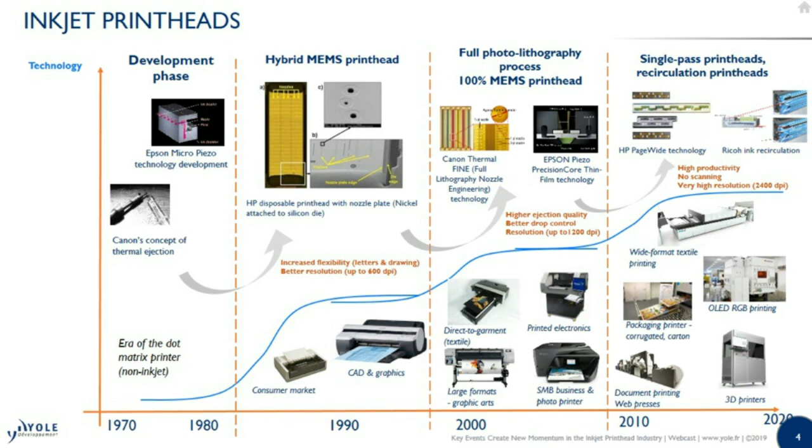As a new definition, I would like to do a reminder of the different techniques that we are using in inkjet technologies and what we are covering also at Yole Développement. The technologies or the ejection principle are either continuous or drop on demand. We are focusing more on drop on demand because it's where the number of players is larger. And for drop on demand, we can separate it into two main actuation technologies: thermal for one and piezoelectric on the other.

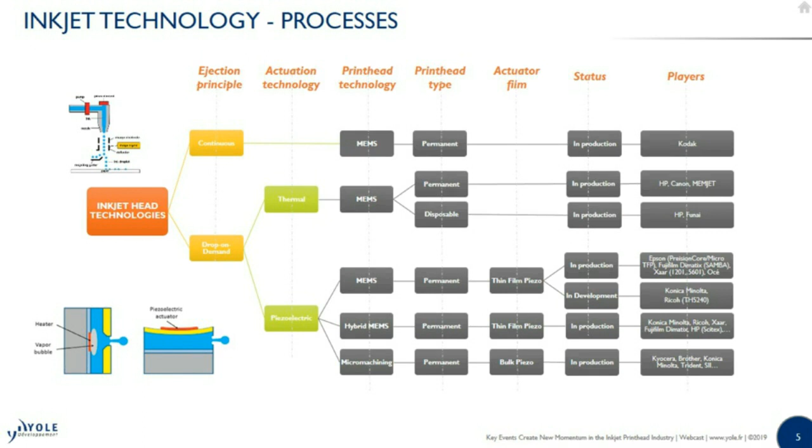Those two different ejection principles are mainly segmenting the players in two, and this is what I would like to show here in this area. Again, it's a mature market with a limited number of players.

The leaders are still the same that you probably know in thermal for the drop-on-demand ejection: HP, Canon, Funai after the acquisition of Lexmark, but also Memjet, that is an increasing player in terms of market share in this sector. We will discuss RealFast Print Technology later on.

In Piezo, Epson, Fujifilm Dimatix, Xaar, Brother, or Konica Minolta are main players. It's where you have the most important number of players in this piezoelectric area.

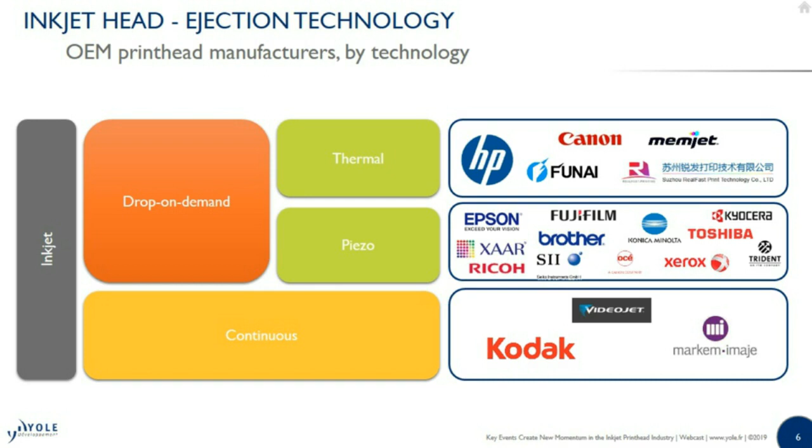In the continuous market, it's mainly Kodak that is the leader in this area. Based on the technology, we have the conventional printheads. What we name the conventional printheads are the printheads based on bulk PZT, so it's the piezo ceramic that is processed to get the actuation.

You can see again the players I mentioned just before, but we also have the MEMS printhead players, and this industry is a little bit different because it means you need to have some semiconductor capabilities to manufacture MEMS printheads. This is synonymous with huge investment and some critical knowledge to manufacture either thermal on one hand or thin film piezo ejection devices.

So here we can have IDMs, the companies that are manufacturing their own printheads, but we would also like to mention the foundries that are helping in this area to manufacture the MEMS part of the printheads or the full printheads.

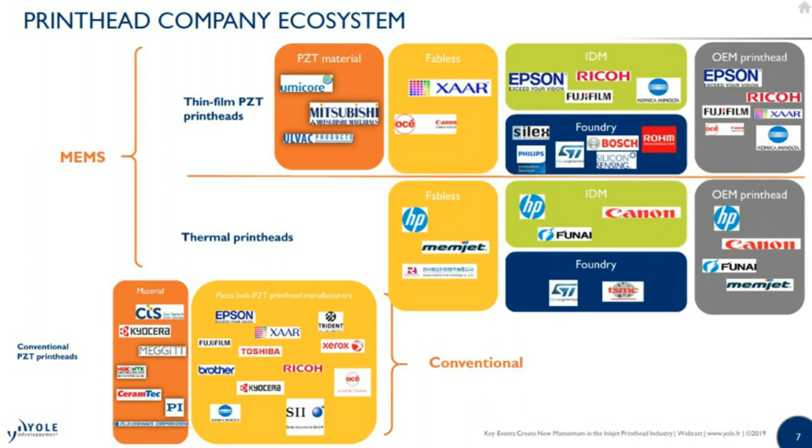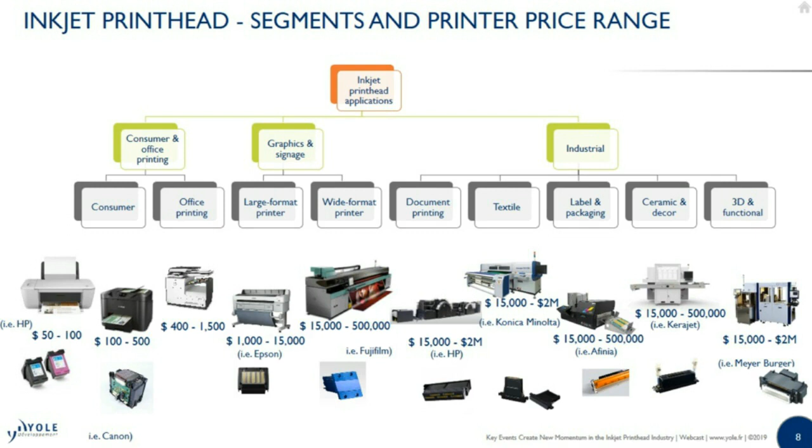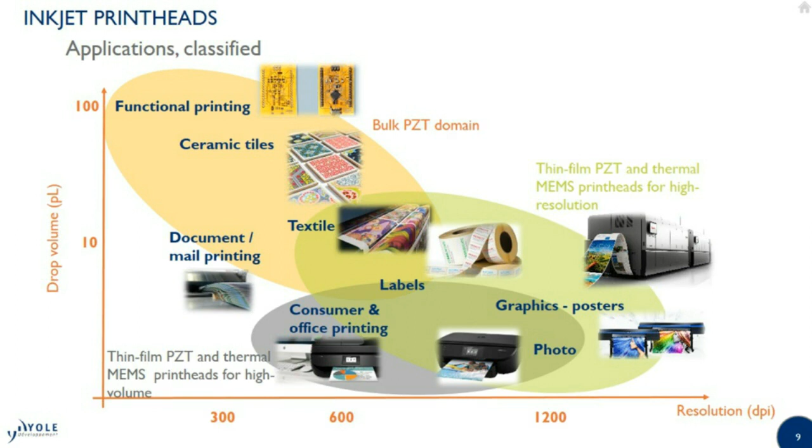Related to the three major markets I mentioned, I would like to show you the results we get from our investigation on the inkjet printhead market. This printhead market has a global forecast that is growing at a 4% compound annual growth rate.

This market is expected to reach $2.7 billion - it's the inkjet printhead market again - coming from a 2.09 or 2.1 billion dollar market in 2018.

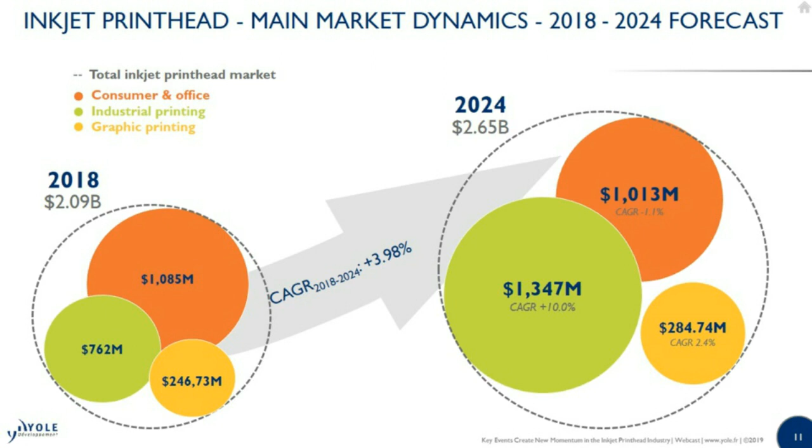About the players: they have a global presence on the main continents, with their headquarters. A lot of companies are based mainly in Japan, but they also have offices, R&D activity, and even some production in Europe or the US, to be closer to customers and get information from their needs.

If we look at the market share, the four first companies represent about 45% of the market: HP Inc., followed by Epson and Canon, which are very close together, and Fujifilm Dimatix. These are the first industrial companies closer to the top three, which mainly serve the consumer market and graphics printing.

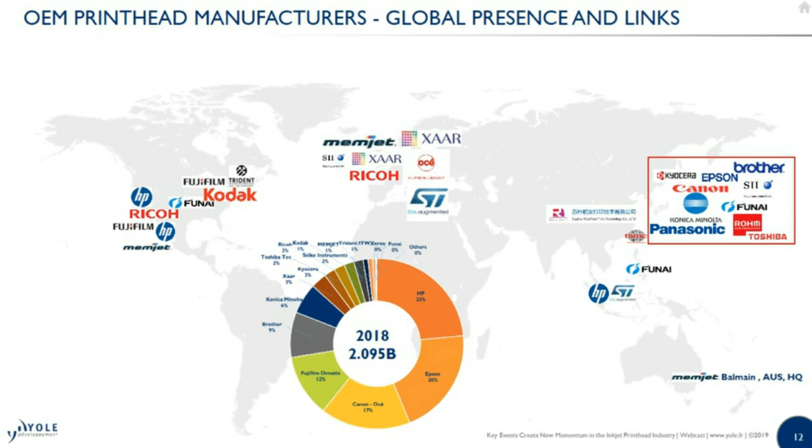About the key events, because the presentation is also based on key events: it's a mature market again, so we have a number of new products, but in terms of structuring the industry, the number of mergers, acquisitions, or events is really limited.

But anyway, we can highlight some very interesting and important events, like Panasonic, whose printhead assets were acquired by Konica Minolta in 2018, reinforcing Konica Minolta's access to MEMS thin film Piezo capabilities.

The announcement of a new player in the area of inkjet printheads: Ruifa Print Technology, a Chinese company that just announced they are ready to produce thermal inkjet printheads.

Epson has completed and announced the completion of a factory with a huge investment in buildings and new production lines, to increase PrecisionCore printhead output, which will also replace their former technology.

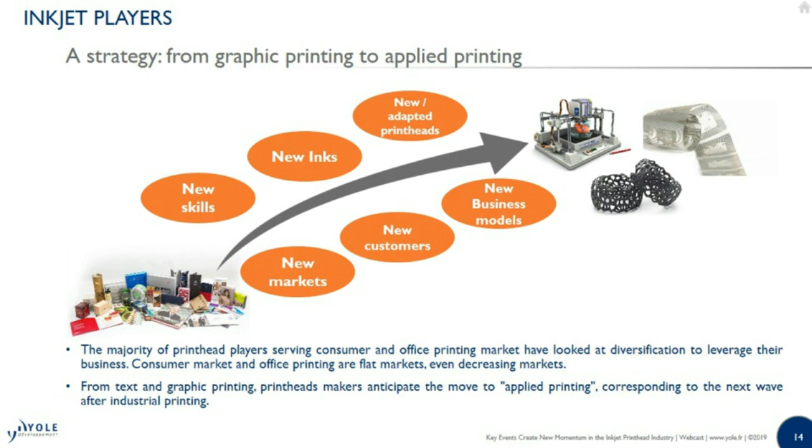To illustrate the different milestones of the major players: it started first from graphic to commercial printing in the past, with HP acquiring Scitex to move into commercial printing, and Canon acquiring Océ, the Dutch company, gaining access to document printing, large formats, and capabilities in Piezo printhead applications.

But now we are moving a step forward toward growth opportunities in the industrial market. Again, HP made the transition to 3D printing, even if it's not strictly 3D inkjet printing — it's a powder bed technology, but it uses their printheads to dispense the fusing agent.

The Konica Minolta acquisition of Panasonic, knowing that Konica Minolta is one of the companies involved in functional printing applications, like OLED display and lighting, shows they are really involved in this market. They wanted to take the opportunity to gain Panasonic's patents and capabilities in MEMS technologies and their development.

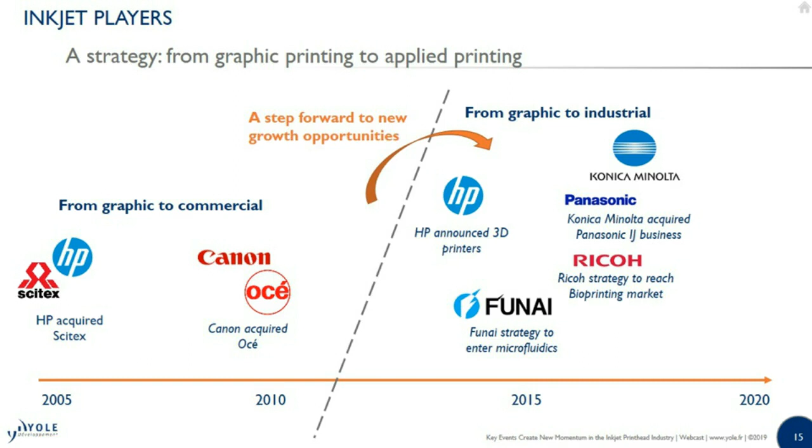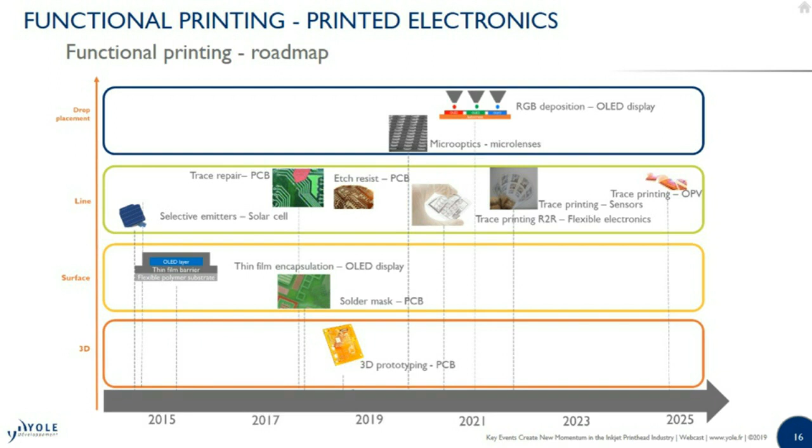This is one of the roadmaps we have established on functional printing, showing the applications of the display market, PCB, flex or printed and flexible electronics, where some growth is possible for inkjet printheads. This is also for biodispensing, just to show that inkjet printheads are also used for bioprinting, but several competing technologies are also in place.

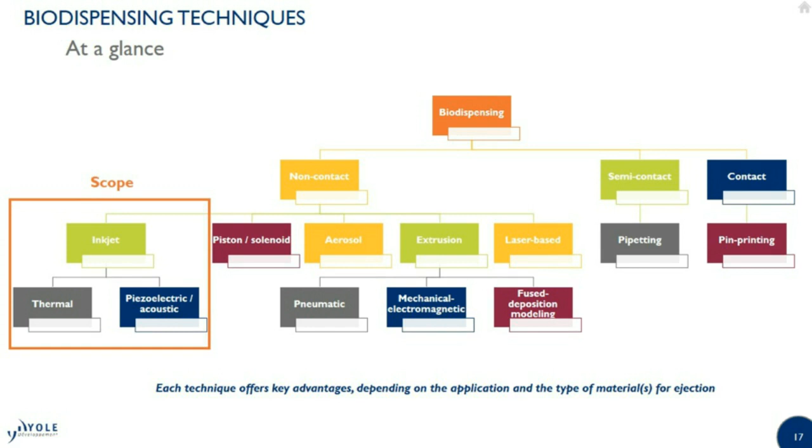It could create some opportunities, and here are some benchmarks of the techniques we have done, just to show that inkjet printing could be used there, but dispensing is much more than only inkjet printing.

For example, inkjet printing could have a very interesting application for high throughput screening for pharma, also for liquid handling, which is what Funai is doing at the moment with Funai Fluidics. For bioprinting, Ricoh is involved in this area. However, extrusion dispensing technique is one of the main technologies now.

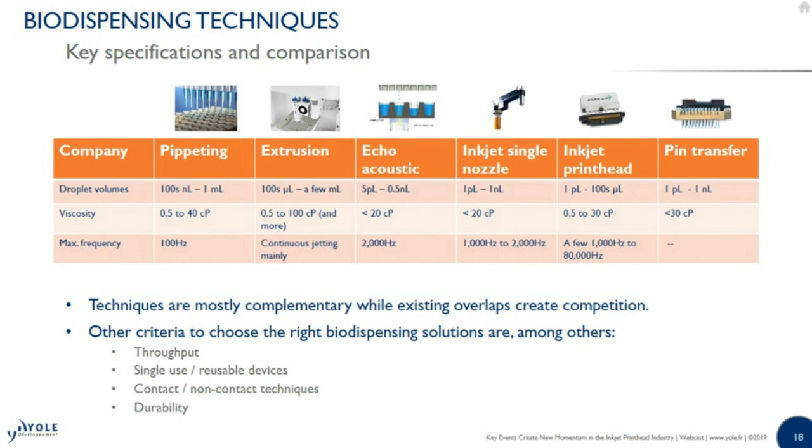What I mentioned about Cellink before is about the technique to bioprint some organs. Cellink is one of the companies with very interesting activity now. They would like to reach this market of almost $800 million for bioprinting, and they have growth through merger and acquisition at the moment to reach this market.

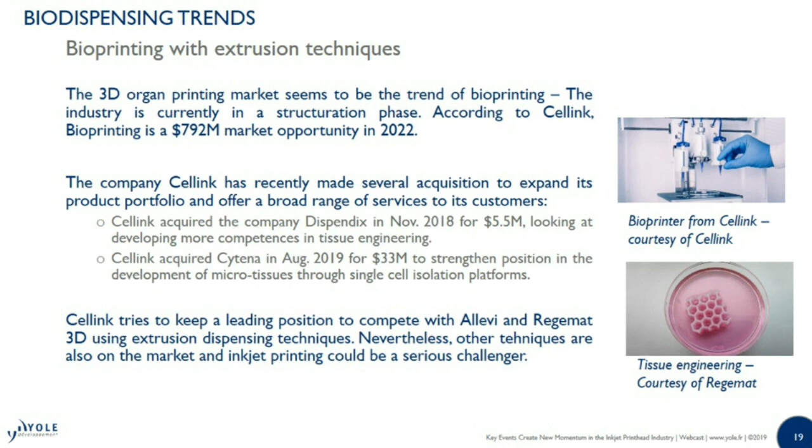This is combined with MEMS technology that allows precision and reliability. This is very important for Epson, and we are now looking at this technology and the increase of production to see how this market will go, and what will be the business model of Epson and the impact on the market with this printhead that is really decreasing the price with this technology.

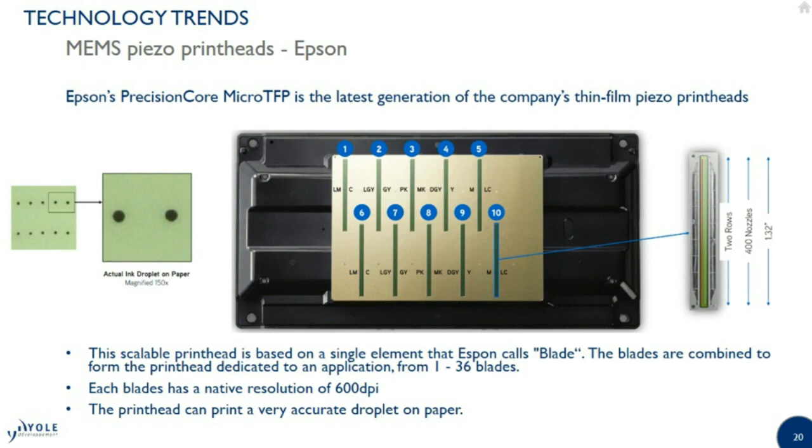Just one word about real fast print technology. This Chinese company, at the moment we know, is part of the Anoky group, which is a chemical company. They mentioned they are ready now to produce the first inkjet printhead for thermal ejection, and they also have a piezo printhead that is ready. At the moment, we would like to follow this company.

We have the same scenario with Memjet a few years ago, but that was on single pass printing. We don't know of any disruptive technology now, but it's something we would like to follow.

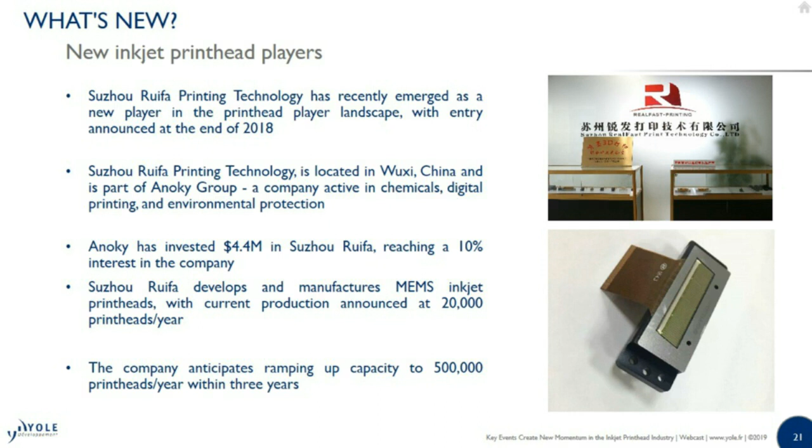For the main advances in the technology, the inkjet printhead single pass printhead, also due to MEMS technology, is one of the major advances for the past years. At the moment, we would like to mention that Epson is combining printheads to do single pass on label printers, but also for office printing now.

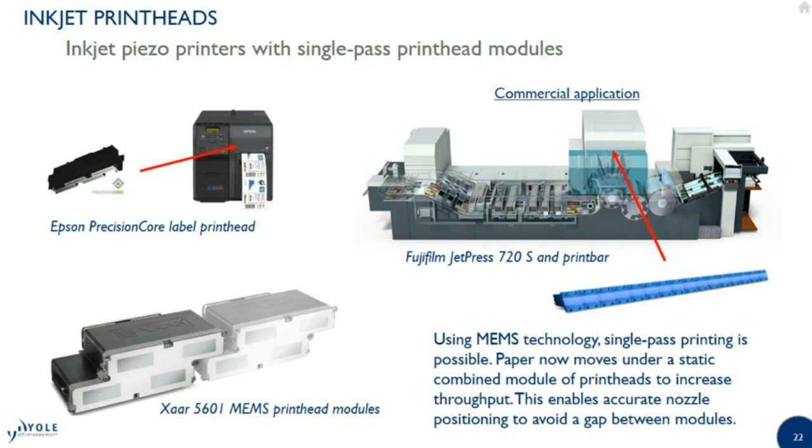Xaar is on the way to release the 5601 MEMS printhead with the module, the S shape, which could also be combined for applications with high throughput. So the idea is really to use it for high throughput.

Another really interesting thing is the ink recirculation. It's also showing the interest of printhead makers, the printhead manufacturers, to go to industrial printing applications, because this is a way to avoid the major issue of printheads, which is clogging when using functional inks.

This presents the ink recirculation printheads, where you have not only the recirculation inside the printhead, but also in the nozzle. This avoids the clogging effect and also the sedimentation effect in the printhead. It allows the use of conductive inks with particles, for example in OLED, well, not only OLED, but mainly for PCB or printed electronics applications.

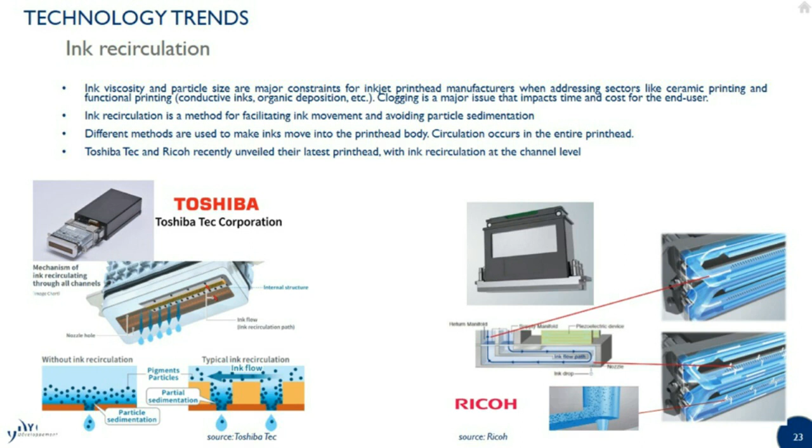We are talking a lot about the piezo printheads here, but also the thermal printheads, like HP's latest Latex R2000 printer, which is based on ink recirculation. The Canon printhead for office printing is also based on this ink recirculation technology. For the use of white ink, it's a real interest to avoid clogging and to avoid maintenance time and cost for the customers.

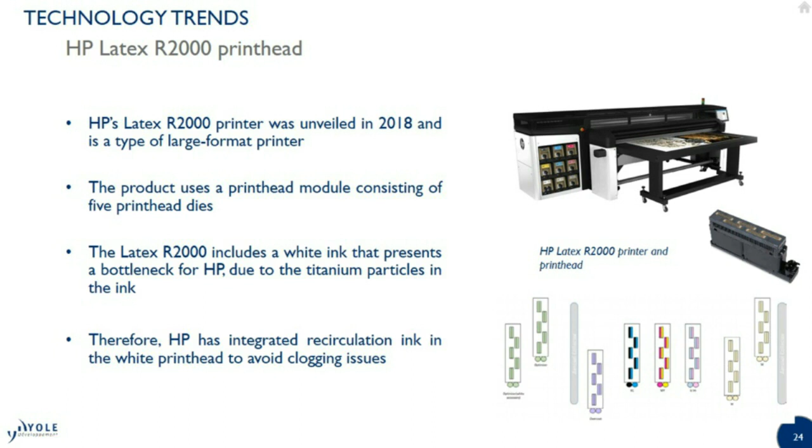So this is what I would like to present you today. It's really just a part of what we have mentioned in our report. For the key messages, I'd like to mention that the inkjet printhead market is mature, but still with key events happening. We forecast a market of $2.6 billion with about 4% growth, with an increase in the industrial market. Those key events are really new factories, new players, and some acquisitions in this market that we will follow for the coming months.

The medium-term strategy for most players now is to go to applied printing, and this strategy is linked to some new technology trends: still the MEMS technology shift, but also advances in bulk piezo, recirculation inks, and single pass printing, which remain strong interests for printhead makers at the moment.

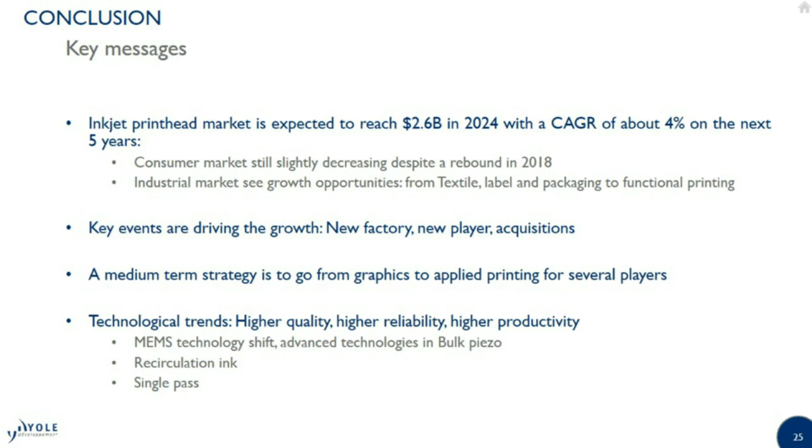Thank you for your attention, and do not hesitate if you have any questions. We will answer you as soon as possible.

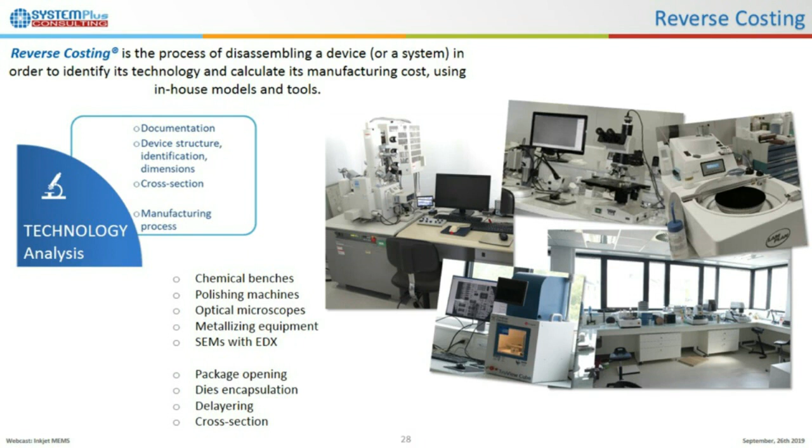For this, you have your laboratory, and with research on documentation, you add more information and data for your analysis. With all these components, you have integrated, in internally developed software, the ability to calculate the cost of the electronic component. You began with integrated circuits, but now for more than 10 years you've covered power components, MEMS components, LEDs, advanced packaging, and electronics boards, for example.

After the physical analysis of the component, you recreate the manufacturing process and enter this process into your tools, combining economical parameters like the equipment, the capacity of the equipment, and the etching rate, for example. With the process, you recreate the manufacturing cost of the component. You perform this for the silicon level, but also for all the operations in the backend and for the system with the electronic board, and sometimes with the plastic part.

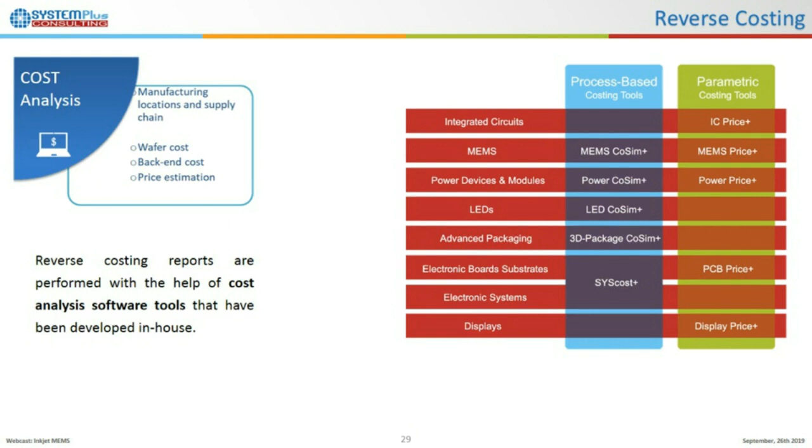In this presentation, I will present you three inkjet dies: the thermal inkjet die from HP for the latest technology, the HDNA high definition inkjet die; the new Epson MicroTPH MEMS inkjet die found in the PrecisionCore inkjet component; and the new MEMS inkjet die from Xaar. For each inkjet die, I'll add a slide focused on the microfluidic part, the actuator (thermal actuator or PZT actuator), and a slide on the inkjet die cost, followed by a comparison between the three inkjet dies.

SystemPlusConsulting has already performed reverse costing of different printheads. We have analyzed a very bulk capacity inkjet printhead, like the Toshiba CA4, in ceramic and piezoelectric bulk material. You have the ColorWave 600 from Océ. And you have, for example, the printhead from Kyocera with printing in laminated steel layer, and piezoelectric actuator into bulk ceramic.

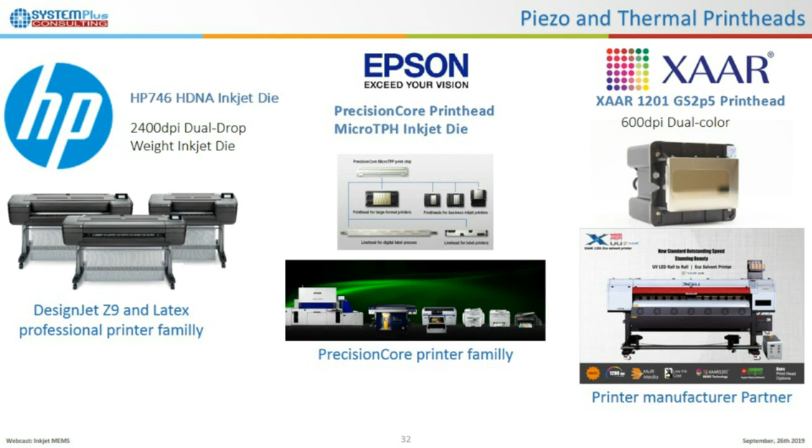Here you have some pictures from the microfluidics of the HP HDNA printhead. Here you have a plastic part from the printhead, and you can see that only on top you have the inkjet die in silicon, and between the plastic and the silicon die you have the ceramic carrier. The ceramic carrier has the advantage of increasing the lifetime of the printhead because it's easier to assemble the inkjet die in silicon with the ceramic carrier, and the ceramic carrier increases the strength of the assembly.

On the top, you can see on the right of the slide, with the arrows, the way of the ink, and the nozzle manufactured in a specific polymer material created on top of the silicon component. Just under the nozzle there are the heaters, and you can see after. On the right top picture, you can see the nozzle with the circle.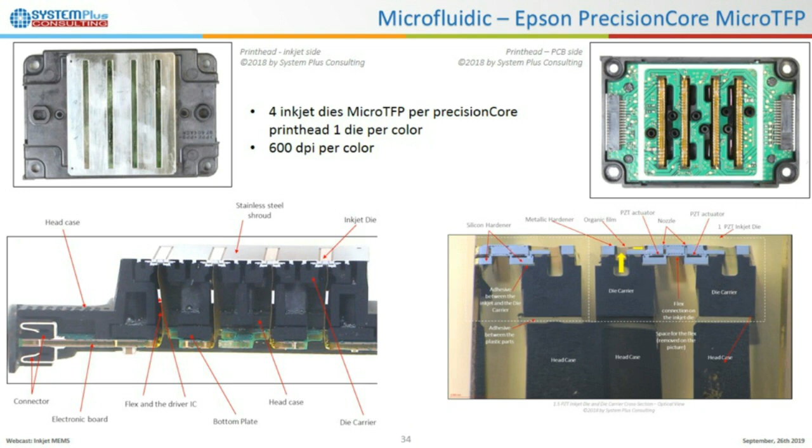But for the Epson microfluidics, it's different, because for each printhead you can print up to four colors. You can see here the path for the ink, for the 4 colors, and some part of the printhead is in plastic, while the active area is in silicon. You can see here with the inkjet die, but for Epson, the nozzle plate with the holes for the nozzles is in steel.

For the HP printhead, the actuator is thermal. You can see here the heater used to heat the ink and create a bubble of vapor and eject the ink through the nozzle. It's not very simple because you need very localized heating, and here you can see that the heating is created by a very specific, very thin layer. It's complex because each time you heat the ink, you generate a shock, and you need to protect the circuit, the electronics close to the circuit, and the heater from the mechanical effect. For this, they use a very specific layer called the cavitation protection layer.

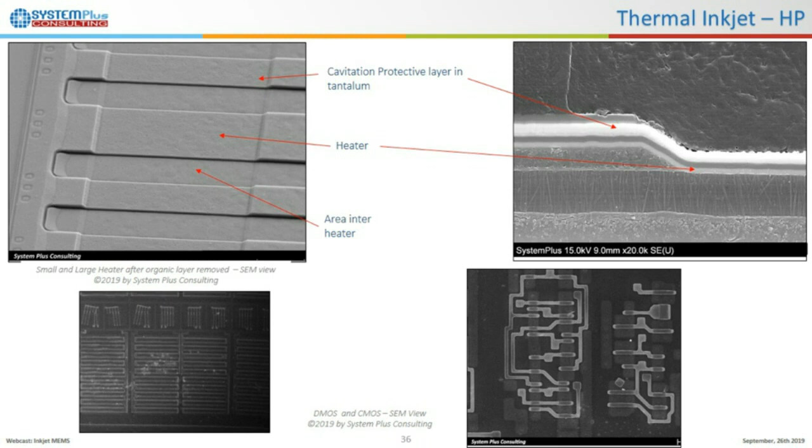For the piezoelectric actuator in the Epson inkjet die, you can see on the top left picture the way for the ink, the yellow arrow, and at the top the nozzle. On the bottom you have the membrane with the actuator in PZT. When the PZT actuator is activated, that generates a bend. The membrane is bent, and the ink is pushed toward the nozzle.

The PZT actuator is probably manufactured by the sol-gel solution with a spin coating deposition, and you estimate that it deposits a thickness of 1.5 micrometers, probably in 5 spin coating steps.

But it's not just the unique characteristic of this printhead, the PZT is not the same. The main parameter for the inkjet is always to share the movement of the ink and create a channel for the ink, the nozzle.

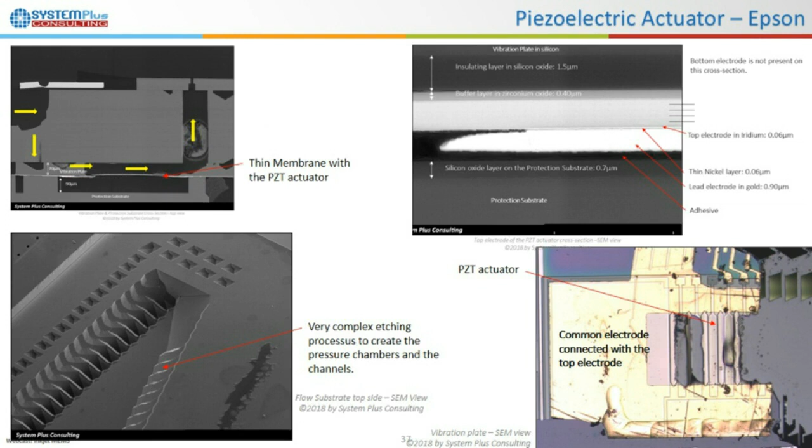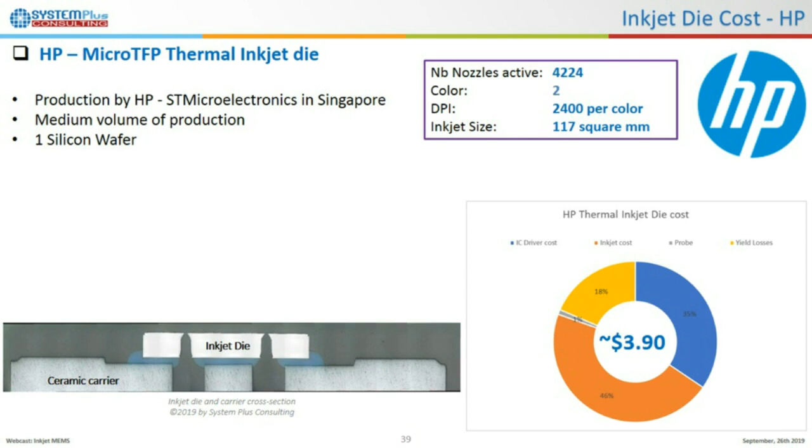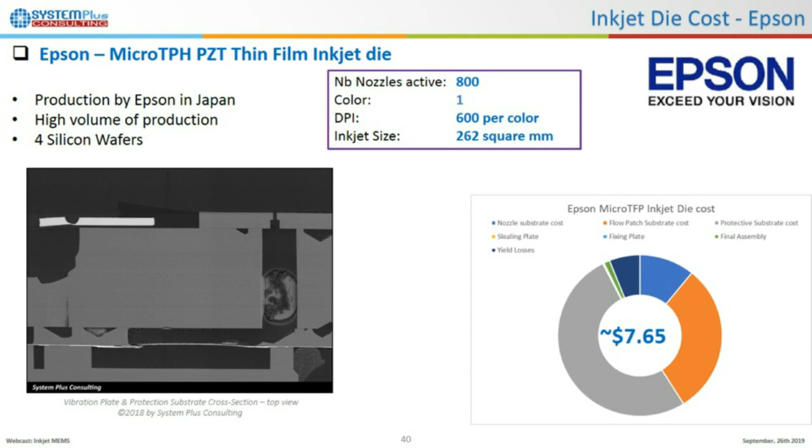You have here the number of nozzles and the area. It's a very large die.

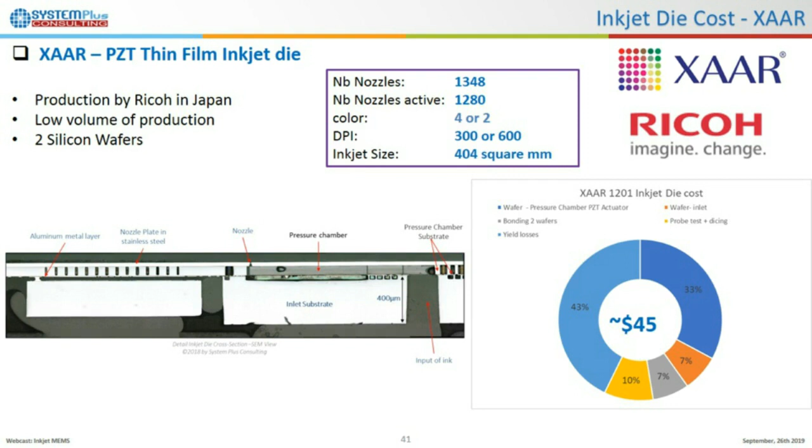Here it's a little comparison between the 3 inkjet dies, and here you have the cost per nozzle. It's a comparison with the nozzle cost. You can see that the new MEMS inkjet die is today more expensive than the thermal inkjet die.

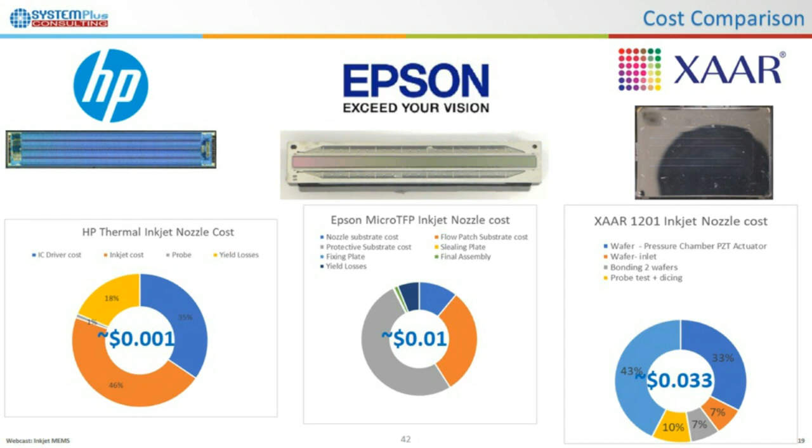Other conclusion, as Jerome already talked about, you can see the evolution of the HP printhead. HP continue with this thermal inkjet die, and they are increasing their definition. Today you can have 2,400 dpi, which is the new HD technology for HP.

But there are always new technologies for HP. They add the dual drop weight technology, which is new for HP and for thermal inkjet die. There is also a new technology added for this generation of product from HP: the recirculation for the white ink, already used for example in the latex printer.

Epson has now sent to the market their MEMS inkjet die with a definition of 600 dpi, and Xaar with a definition between 300 and 600 dpi. But in addition, there is the possibility to have up to 8 gray levels for their inkjet die. And with this, Xaar says that with these 8 gray levels, they can have a definition of 1400 dpi.

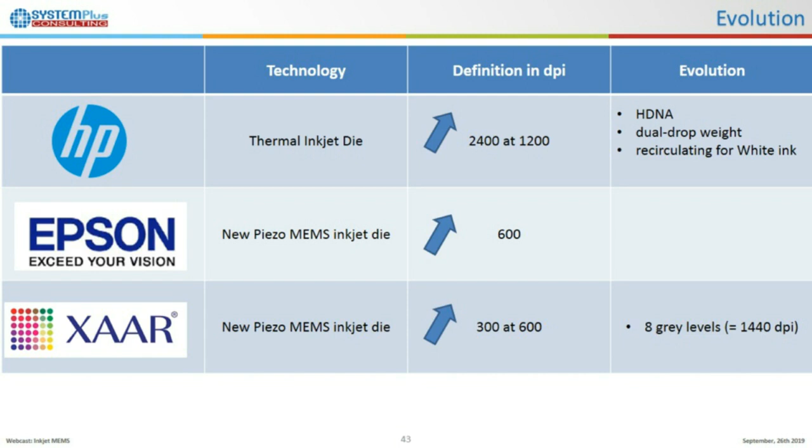Thank you for your attention. It's fine.

Thank you, Sylvain, for this interesting presentation. There was so much to say about this inkjet printhead industry. Maybe we have to conclude. Let's have a Q&A session, maybe with 2 quick questions as we are running out of time, and we will follow up with the other questions by email. So I've got one question, maybe for you Sylvain: what are the main cost drivers for piezo inkjet technology?

Today, for the piezo inkjet die, the main cost is the inkjet die itself. It's a very large die, and today they are manufactured on 6-inch wafers because Epson and Ricoh have used their old foundry in 6-inch and optimized the PZT actuator process on this foundry. But when you have a small wafer with a large die, the number of die per wafer is very low, and this increases the manufacturing cost for the die.

And I think for the other criteria, mainly for Ricoh and Xaar, it's probably the low volume of production. There are some specific equipment needed to process the PZT on the electrode, like specific equipment for spin coating or deposition of plating or other processes. And the depreciation of this equipment over the low volume of production increases the cost of manufacturing.